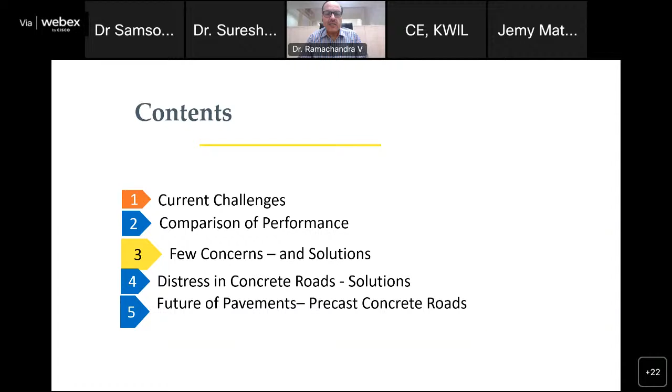So these are the contents: the current challenges we have, comparison of performance, and concerns and distress in concrete roads and solutions. These are the things that I want to deal with today.

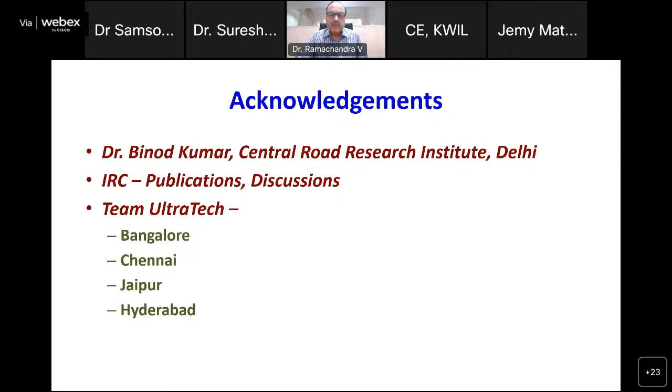Whenever I think of concrete roads, I always remember this great man, Dr. L.R. Kadiyali, who brought me into this concrete roads field. He pulled me into this, and I am forever indebted to him. He exposed me to the various aspects of construction of white topping as well as concrete roads. In my lecture today, I respectfully acknowledge contributions from Dr. Binod Kumar of CRRI and several IRC publications and discussions. As a committee member, I have gained a lot from them. My team in Bangalore, Chennai, Jaipur, Hyderabad, and Kharagpur have always worked with me implementing these things.

Coming to concrete pavements, India has a very small share of concrete pavements. Japan has about 6% of its roads as concrete roads, whereas in the US it is about 35%. Korea has the most, with 63% of Korean roads being concrete roads, compared to less than 5% concrete roads in India.

In these days, the number of concrete roads coming up is quite huge. It is not that concrete roads are new. Long back, considering the world affair, 1909 was when the first concrete road was made in Detroit, USA. On the right-hand side is a very interesting thing: a pavement with interlocking concrete paver blocks in USA, done in 1906, more than 110 years back. This photo is not from 106 years back though, it was taken hardly about 20 years back, which means even after 90 years of construction, this road is giving fairly excellent service.

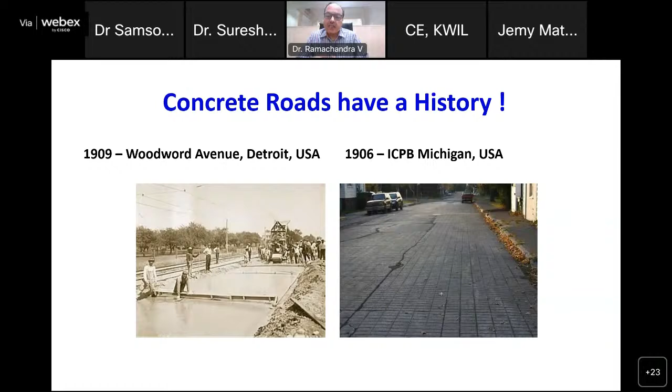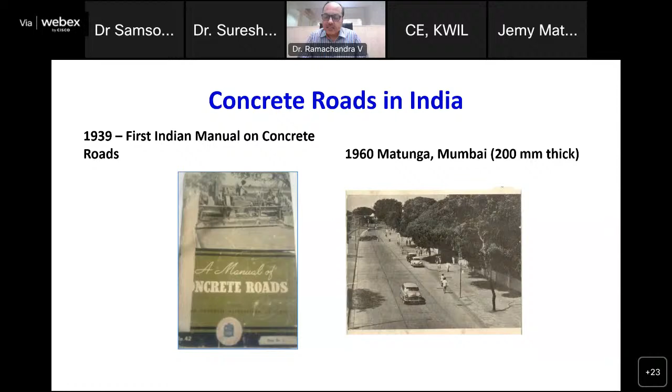As far as India is concerned, the first Indian manual on concrete roads was published in 1939. On the right-hand side is the concrete road built in Matunga in 1960, 200 mm thick, with no overlay even today. I repeat, even after 62 years there is no overlay, and this is giving excellent service even after 60 years. That is the life of concrete roads that you have.

But currently we have a lot of challenges as far as our roads are concerned. This is a very common scene, whichever city you are in. Don't look at the color of the bus and say that only Mumbai is bad and other cities are better. Wherever bituminous pavements are there, this is a problem that we are seeing. As per 2017 statistics, pothole-related deaths, people who died due to potholes, were more than 3,500 in India.

Peter. Sanjay? Sir, I think there are some issues with Ramachandra sir's net connection. Okay, probably you can contact him and he can mute his video if it's okay.

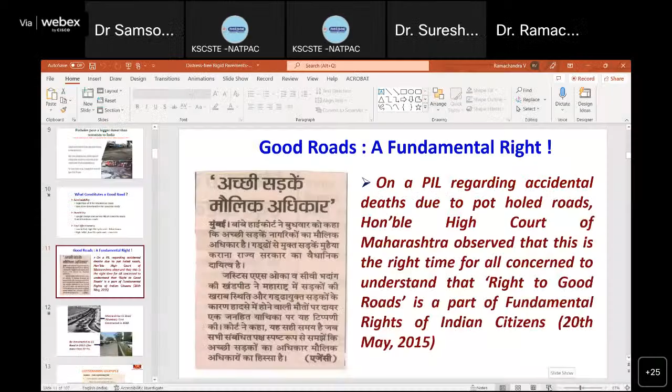Yeah, I think I have joined now. Okay, sir. My slide is visible now. Sir, slide number 9, I hope my slide is visible now. Yes sir, you are talking about slide 9. Now I'm talking of good roads as a fundamental right. Right sir, yes, no problem. Other things I have already explained, therefore there is no issue. In fact, the Bombay High Court, in the year 2015, has said that right to good roads is a part of fundamental rights of Indian citizens.

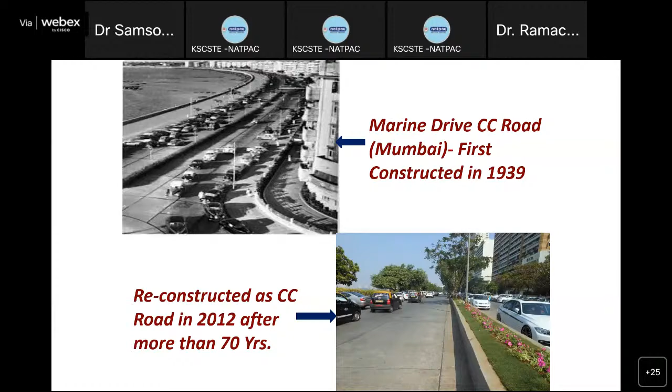So it is also important that because this is recognized as a right to have a good road, it is imperative that we construct good roads. Now, this is the Marine Drive Road, constructed in the year 1939... it lived for more than 70 years, and in the year 2012 an overlay was put after 73 years of its service. There are several such examples.

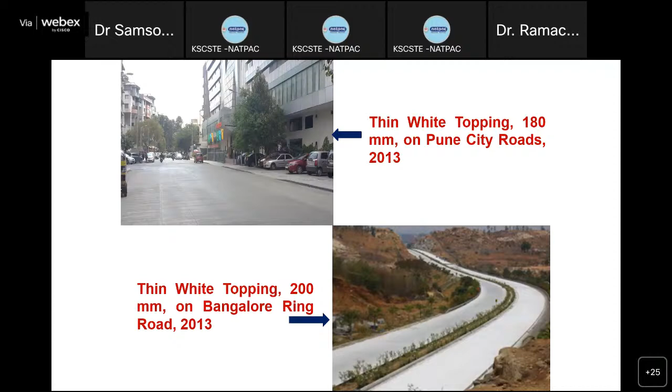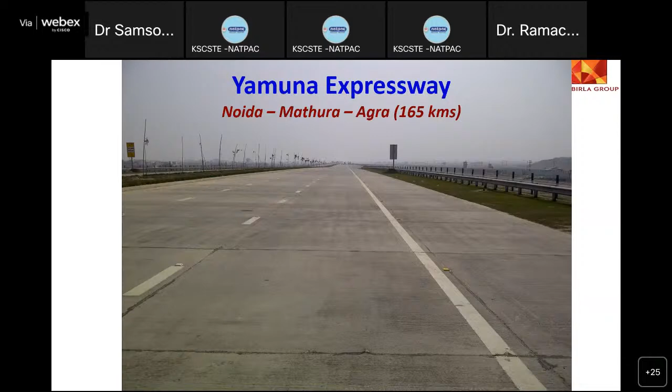The Mumbai Expressway was constructed, and in white topping, Pune has constructed a lot of roads. Even Bangalore and Chennai have quite a few roads made out of white topping. Now as far as highways are concerned, the Yamuna Expressway, 165 kilometers between Noida and Agra, is constructed with blended Portland Pozzolana Cement, PPC cement. This is constructed with M45 grade of concrete, an 8-lane road, and you can see this road is not inferior to any roads you see in any advanced countries.

Now when we think of the comparison between a bitumen road and a concrete road, the difference is that because concrete is a rigid material, the loads get distributed over a larger area, and therefore pressure on the layer below is always less. In case of bitumen pavements, the loads get distributed to the layers below also, and therefore the pressure is normally higher. So one question that comes, which I have just put for comparison, is: who damages the roads most?

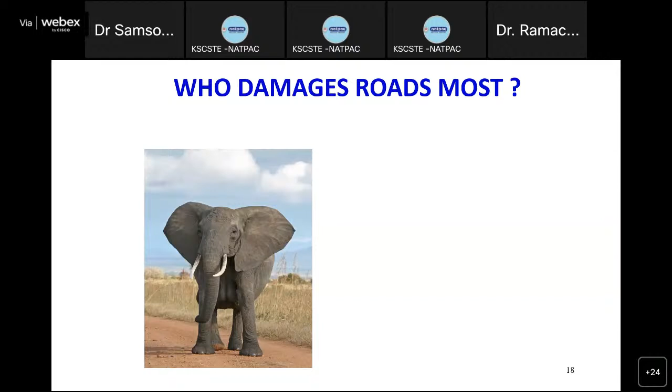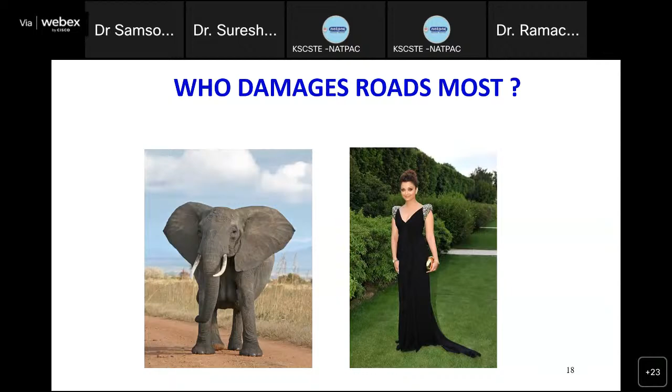We are talking about the damages. Who damages the roads most? An elephant walking on the road, will it damage the road most? Or a beautiful lady like Aishwarya Rai walking on the roads, will she damage the roads worse than the elephant? This is a simple question, and the answer is quite obvious.

Let's assume Aishwarya Rai weighs 60 kgs and she stands on shoes with pointed heels. So, 60 kg divided by 2 shoes, 2 points, 5 square centimeters per point, the pressure comes to 3 kg per square centimeter.

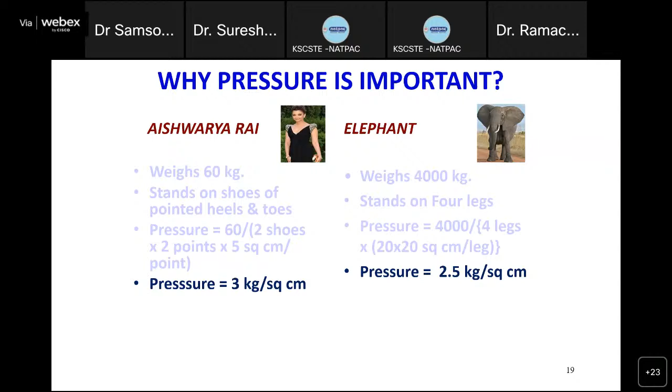Whereas in case of an elephant, it weighs 4,000 kg and stands on 4 legs, with an average area of 20 by 20 centimeters per leg. The pressure is 2.5 kg per square centimeter. Therefore, it is not the load that is important, but the pressure distributed over an area that causes damage to the roads.

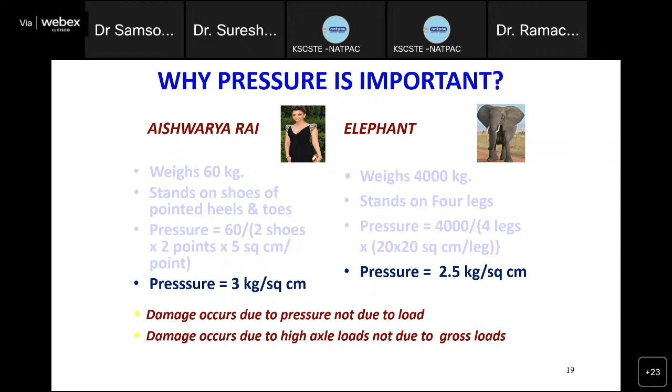There are a few issues I want to mention before we go to the stress analysis. Concrete roads are very good from several points of view: from the cost comparison, it is better, from sustainability it is better, life is better, maintenance is nil, and light reflection is better, and so on.

So many good things are there, but there are a few issues. Number one, when concrete roads are constructed, we cannot allow digging of concrete roads. Normally, whenever a road is constructed, after some time some agency, whether water, power, or sanitary services, needs to access their service lines, so they dig and cut open the roads. This is one thing we should avoid.

Second, generally when you drive on a concrete road, the noise will be slightly higher compared to bitumen roads. This noise can be reduced by going for longitudinal texturing rather than transverse texturing, which is not a normal practice in India, but it reduces noise.

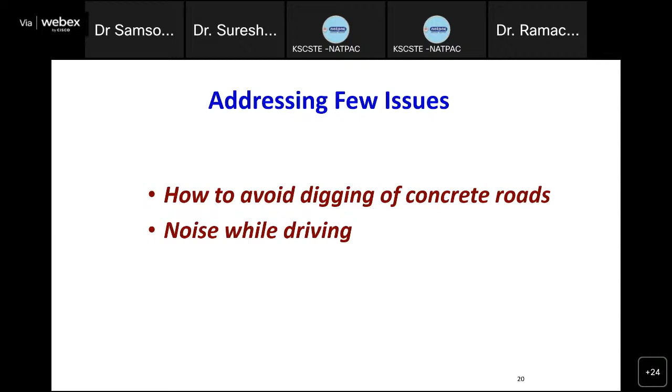These cross ducts are placed at, let's say, 50 or 75 meter intervals, depending on the population of that area. You can always access service lines through these cross ducts instead of digging the road. Even on small roads, this can be done, with cross ducts present at regular intervals so that you can access whatever service lines are present on that road.

Maintaining quality in concrete road construction is always most important so that we avoid problems. If there are problems, there are always solutions, but it is better to avoid problems by going for better quality in road construction.

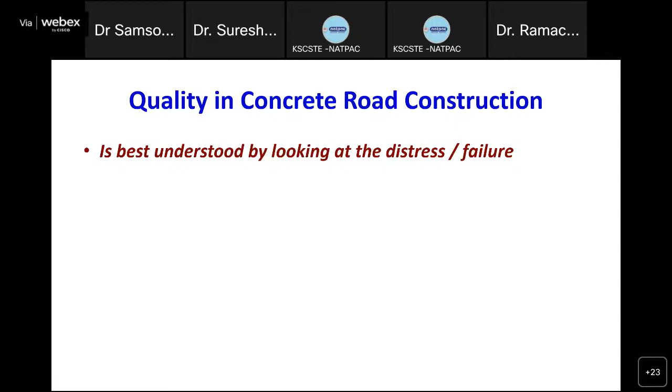This is always best understood by looking at the distress pattern or failure pattern. The reasons could be deficiency in design, material, mix design, or construction, which starts showing up in the form of cracks, structural failures, etc. But if the distress is noticed, correction techniques are always available.

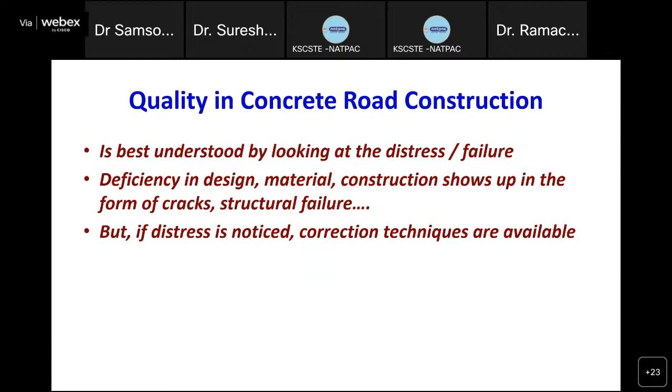There are a lot of IRC codes available for the design, construction, and maintenance of concrete roads. In fact, IRC has been revising these codes quite regularly. One of the latest is IRC SP 83, 2008, it was revised again in 2018, guidelines for maintenance and rehabilitation of cement concrete pavements.

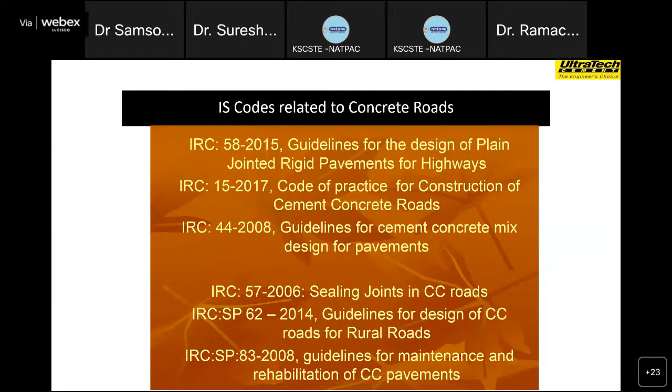These are all the IRC guidelines for construction of roads that need to be followed. For design guidelines, IRC 58 is always applicable for roads having commercial traffic over 450 CVPD. For low volume traffic, you have IRC SP 62, which needs to be followed. Now, one or two basic things as far as PQC, pavement quality concrete, is concerned: normally concrete roads are designed for flexural strength.

It should be about 40 to 45 kg per centimeter squared, or 4 to 4.5 MPa flexural strength. If you use M35 or M40 concrete, you will be able to achieve this.

Suppose we go in for manual concreting, which we used to do in the earlier days, the slump can be 40 to 45 mm. Whereas if we use fixed form paving, concrete comes in transit mixers as ready mix concrete, and it is poured and pumped. For pumping, you require a minimum of 75 to 80 mm slump, or even 100 mm slump. If it is less than that, it becomes difficult to pump concrete.

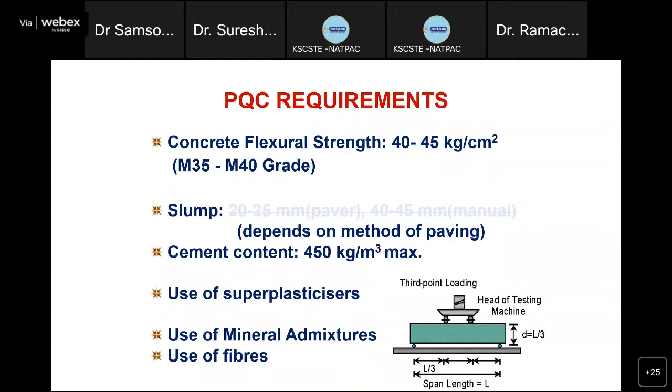The last one is about the use of fibers. Use of fibers will help us in reducing cracks; crack control will be much better if we make use of fibers. It is not necessary that we use steel fibers; even polypropylene fibers or polyester fibers are good enough to achieve crack resistance.

Now let us directly come to the distress part on the concrete road. What are the types of distress that we see? These distresses can be classified as structural distress and functional distress. If concrete has a structural problem, it is definitely a very serious issue. If it has only a functional problem, corrections are definitely possible. We need to look at the failures and determine whether it is a structural or a functional failure.

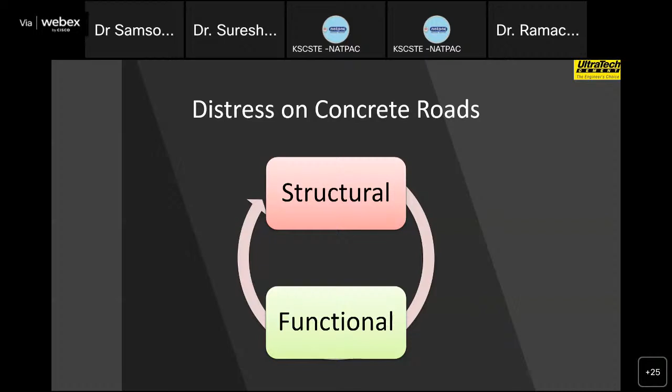Now let us go through the different types of distress and their causes. First, let us look at cracks. We can have transverse cracking, longitudinal cracking, corner cracks, durability or D-cracking. There can be certain joint defects, joint seal damage or spalling of concrete. There can be some minor surface defects, map cracking or shrinkage cracking, scaling, polished aggregates, and pop-outs.

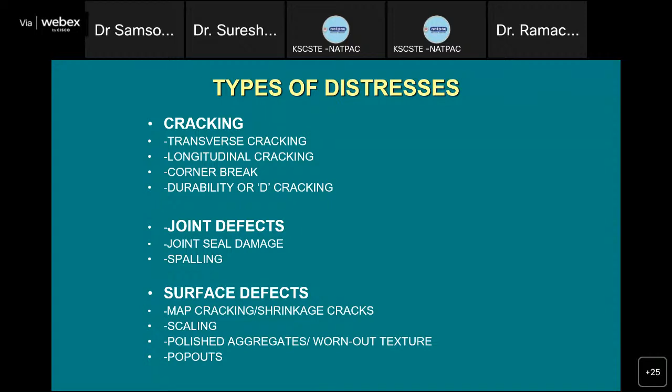Let us try to understand what these types of distress are. Longitudinal cracking, in recent times, is being seen on a lot of our highways. Indore bypass is one example. In fact, when we were doing our white topping work in Kharagpur, we noticed this on national highway NH60, longitudinal cracks very close to the shoulders. This was observed, and the length of this crack goes into 1.5 kilometers. Longitudinal cracks continue to be there.

When a core was taken at the grooves, you can see below the grooves there is no crack, which means concrete is cracking somewhere else, not where we want it to, that is below the grooves. Reasons for this could be many. One reason is that because of the widened shoulders, the slab action will not be in the longitudinal direction but in the transverse direction, making the length across longer. Second, the shoulders do not have as much support as the main line. Below the shoulders are the subgrade and subbase, which are not as strong as the main road's subbase or subgrade. Therefore there is a differential effect, which also contributes to the longitudinal cracking.

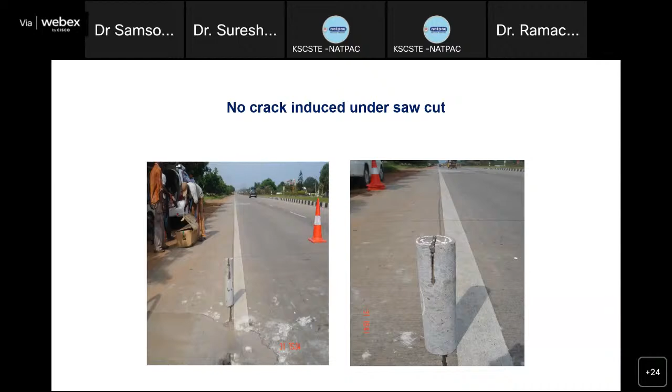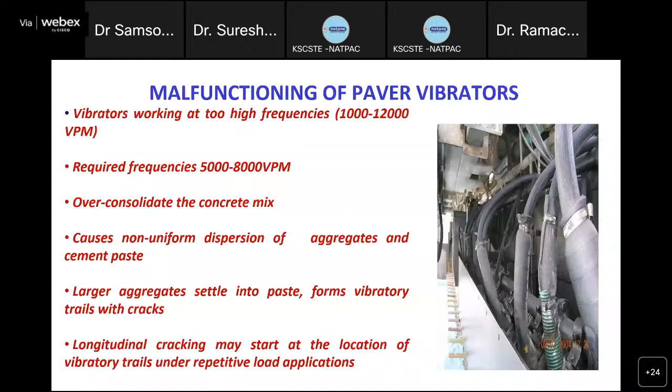Normally, the frequency of the vibrator should be around 5,000 to 8,000 vibrations per minute. If the vibrations are too high, of the order of 10,000 to 12,000 vibrations per minute, it will result in this kind of cracks. It causes non-uniform dispersion of aggregates—there's too much vibration, and the aggregates and cement paste get segregated, leading to these vibratory cracks. Therefore we must take precaution during concreting and ensure the vibrator frequency stays within the specified range of 5,000 to 8,000 vibrations per minute.

Now let us consider the other types of distresses, one after the other.

Now, how do we avoid this? The best way to avoid plastic shrinkage is to do night concreting rather than day concreting. During the night, if concreting is done, it will always be better since the temperature will be quite cool. But since we cannot always do it at night and have to do concreting during the day...

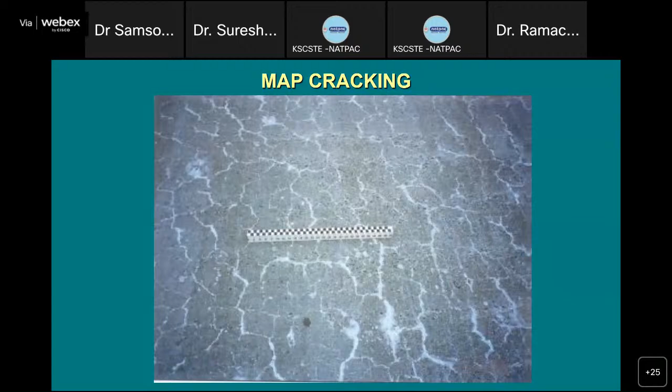Sometimes what may also happen is scaling. Scaling means removal of the finer surface material from the top surface—the cement paste gets eroded and aggregates get exposed. This is called scaling. If there is too much fines in concrete, meaning the cementitious material content is very high, combined with non-uniform vibration, that leads to scaling. How to correct it, we will come to that later.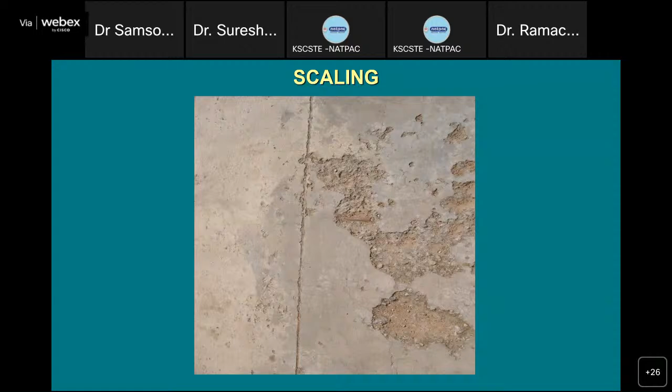Sometimes if the finer materials on the top surface are all removed, it exposes the coarse aggregates. As vehicles move on these coarse aggregates, they get polished, and therefore you see what is called a polished surface on concrete roads. This is also one type of defect observed on concrete roads.

Now you can see here, in one part of the photograph there is no polished aggregate, but on the other part you are finding polished aggregates. This happens because of ineffective curing before ponding or a high water cement ratio. One lot of concrete got a good mix, while the next lot was not good in terms of water cement ratio, and curing was also not efficient. Therefore you are seeing two different types of behavior on the same road.

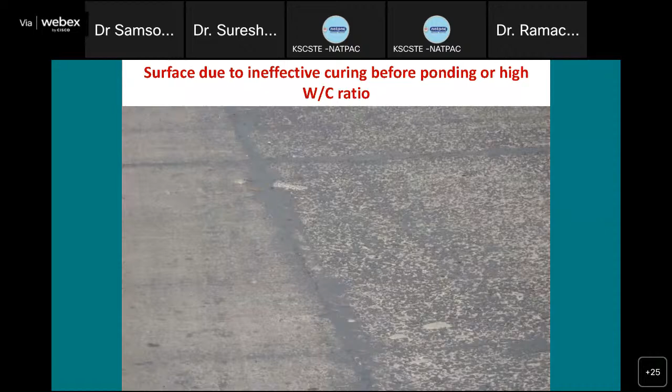Now, pop-outs like this happen if there is no proper quality control, or in other words, there is some organic matter on the surface when you are concreting. Once concrete hardens and this organic matter goes off, it leaves a pop out like this.

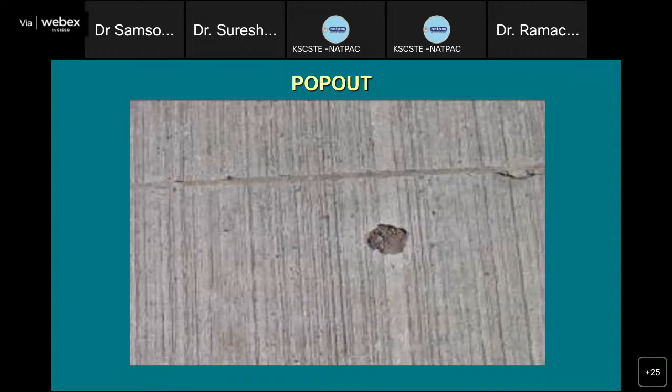These kind of pop-outs happen because when concrete is still fresh and not set, if either dogs walk on this or human beings walk on the road, it will leave footprints. This is something very unfortunate. You can understand if dogs cross the road, you cannot control all the dogs, that is all right. But if we cannot control human beings crossing the road when concrete is soft, that is a very unfortunate thing. It requires a lot of time, effort and money to correct these things. This is a typical pop-out.

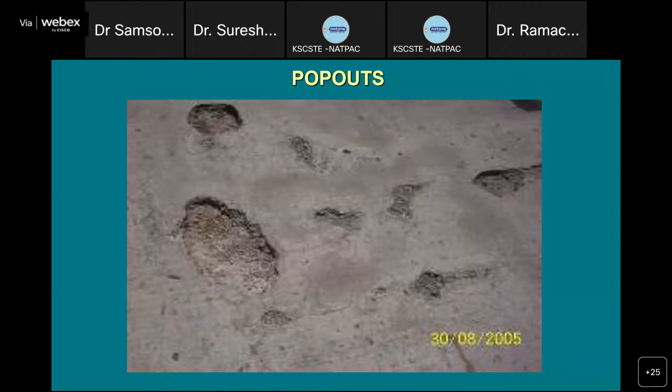Now let us come to how to prevent this, and what is the treatment in case cracks are there. Cracks in concrete can be classified under three heads.

One is concrete in the fresh state, meaning concrete is still fresh, green and soft. The second case is the plastic state, meaning concrete has set but has not hardened. That means within about the first 24 hours, concrete has set but not hardened, and it has started picking up its strength. The third are the cracks that happen in the hardened stage of concrete, after 1 week, weeks, or after 1 or 2 months.

Now, if you look at the fresh state, as I have shown examples earlier, cracks may come because of operational reasons, because of vibrations of the paver machine. It can also be mix related, maybe not a proper uniform or cohesive mix. It will also happen because of loose edges.

Whereas in the case of plastic state cracks, mainly it is the thermal shrinkage or plastic shrinkage cracks that you observe. Whereas in the hard state, when concrete hardens and high strength concrete is used, it is slightly brittle, and therefore when it hardens it starts shrinking, and because of the internal stresses, some cracks would appear.

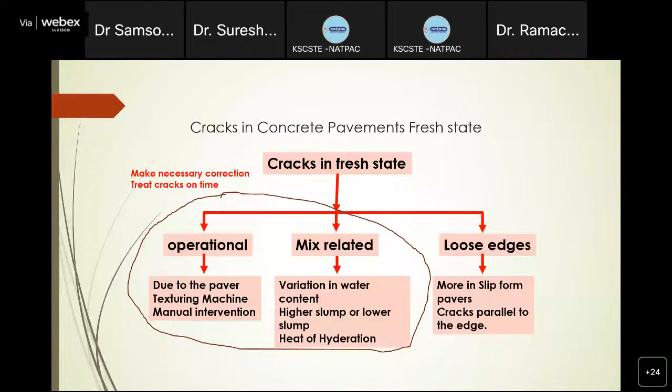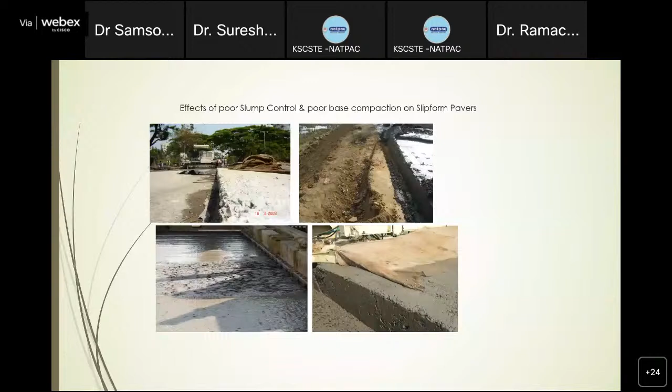Therefore, in all these cases, we must make the correction then and there itself, not delay that. Here you are seeing some photographs showing the effect of poor slump control and poor base compaction in slip form pavers. Now the edges, in some cases, you are seeing it is breaking. These are the cracks like this, which are happening when concrete is still in the fresh state.

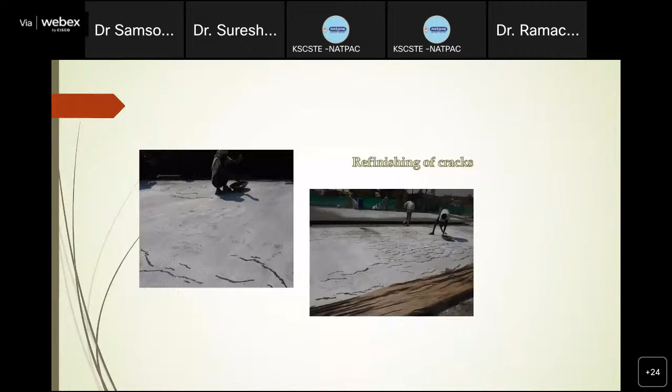We can always do refinishing, meaning with slight cement or cement mortar with water, you make that slurry, cement slurry or mortar slurry, and you refinish the entire surface with the trowel, correcting these cracks. These cracks would get corrected because concrete is still in the fresh stage. Now, for cracks in fresh concrete, the treatment is: number one, identify the reasons for the cracks to appear and take the preventive measures.

For cracks that appear while the concrete is still green, retrowel the concrete with a thick cement slurry or cream vibrated concrete, and do the texturing. These texturing machines should be ready and available, and transverse or longitudinal texturing should be done as early as possible. Curing compound should be applied immediately after texturing. That means laying the concrete, finishing it, texturing it, and immediately after, applying the curing compound. Automated engines will take care of this.

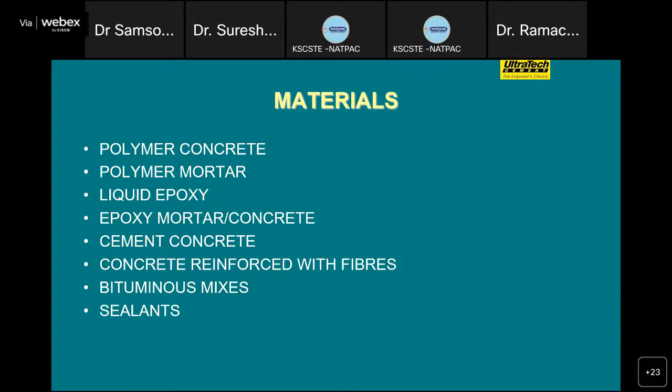Now, what are the repair techniques? In case cracks or pop-outs are there, what repair techniques do you have? There are many repair materials available today: polymer mortar, polymer concrete, liquid epoxies, epoxy mortars, normal cement concrete reinforced with fibers, fiber reinforced concrete, bituminous mixes, and sealants.

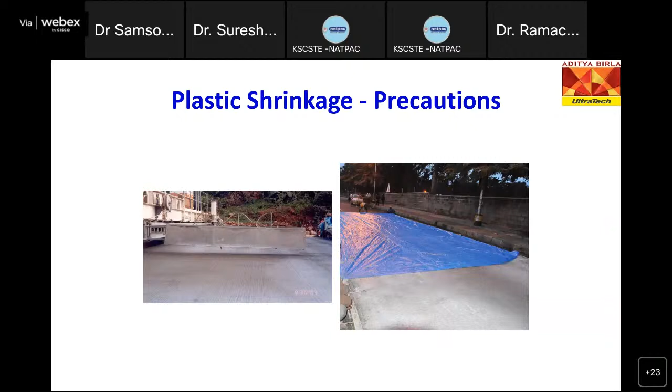This is what I was telling you about plastic shrinkage cracks. Covering it with a plastic sheet is the best precaution you can take. In the other photograph, you can see curing compounds being sprayed onto the road so that it forms a layer and prevents cracking.

Now, in case shrinkage cracks appear, the procedure is simple. Clean the cracks with a wire brush and pour low viscosity epoxy resins, which are available in the market, into the crack, and sprinkle fine sand over this sealed crack for skid resistance. That will take care of plastic shrinkage cracks.

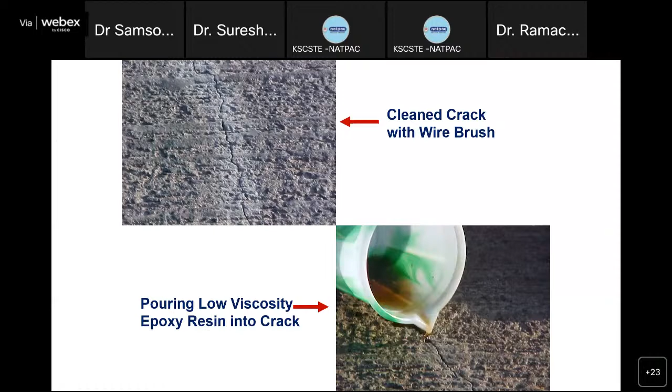You can see in the first photograph the cleaned cracks with the wire brush, and then the low viscosity epoxy resin poured into the crack, and sand sprinkled over the cracks for skid resistance, and the road is finished.

There was one hand raised. There was a question, I believe. Professor Kavita, if you have the question, you can ask right now, or we can take it later also. It is yours. I think we'll take it later, sir.

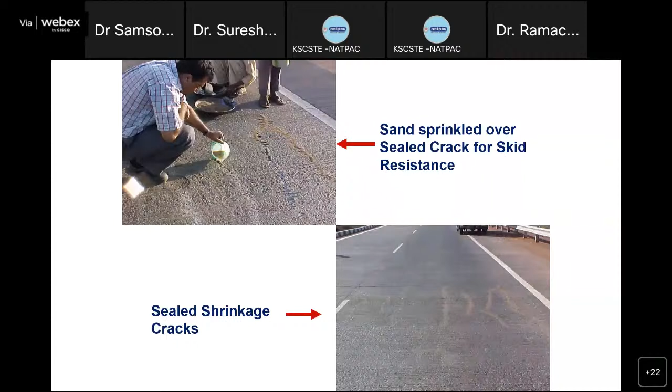Okay, now the road is finished and you're able to see the sealed cracks. Now, if the cracks are wider, let us say half an inch, then we manually widen them to about 3/4 or 1 inch so that the repair epoxies can be poured into it. You can see it is being finished.

You have these grouts that are available very widely. They are applied and the cracks are all finished. The only thing is, once finished, you may be seeing these finished patches. They may be visible, but functionally that will not cause any problem.

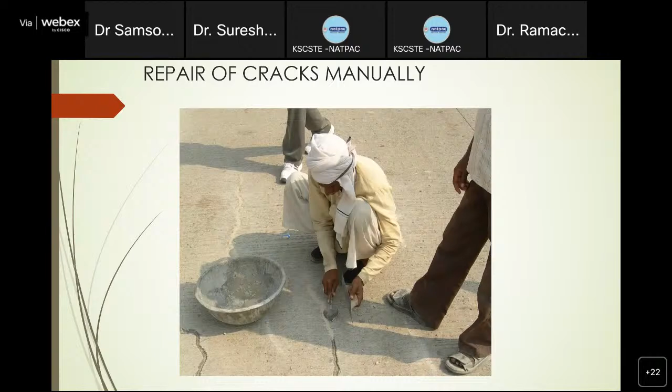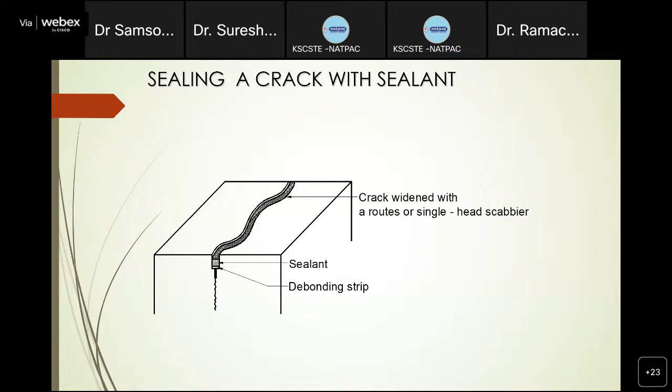Sealing a crack with the sealant: the crack, if less than half an inch wide, is actually widened up to about 1 inch, and then sealants are applied, and the debonding strip is also placed.

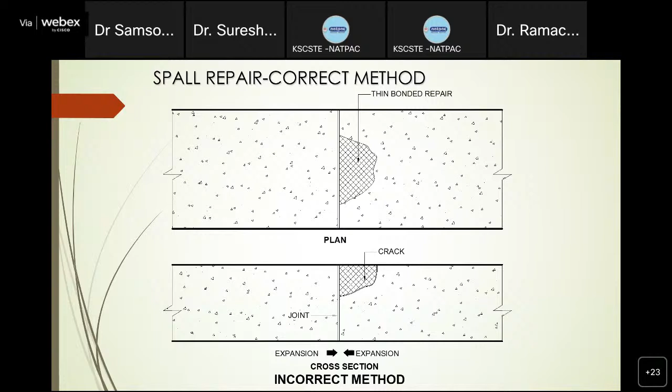Now, if there is spalling of concrete, as in the case of a pop-out, you can see that in the plan and elevation. You must make sure it is a rectangular surface in plan as well as in elevation, otherwise whatever grouts you apply will not stick to the road. Therefore, make it rectangular in both plan and elevation, and the depth should be at least equal to 1 inch or 25 mm.

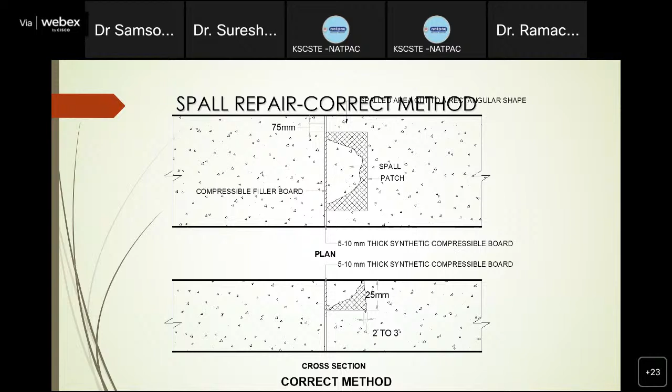And finish it with epoxy, which can get a strength of about 40 to 45 MPa within 24 hours, not 28 days. They can get a strength of 45 MPa within 20 to 24 hours. So we can use that so that the road can be opened to traffic very fast.

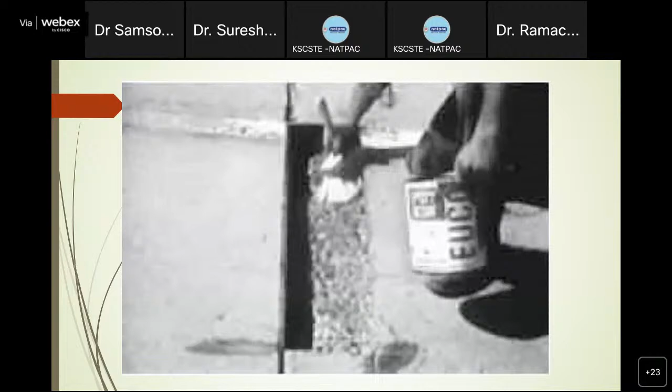Now this is one case where the deteriorated portion is being removed, and it is made rectangular in plan as well as in elevation, and finished with cement grout or concrete grout, so that the road is restored to its original condition. This is what is called a thin bonded repair.

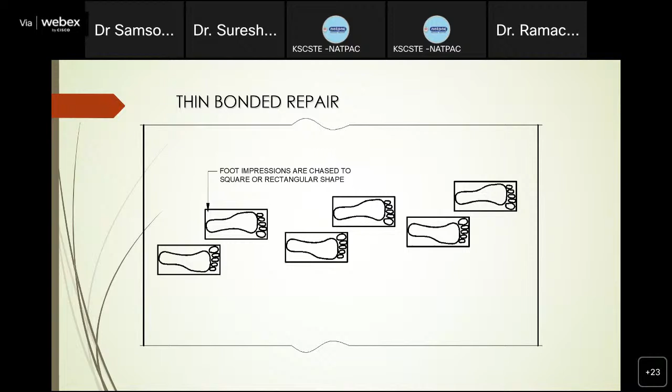If there are pop-outs like this, make it into rectangular parts and then finish it with that. This is another one, repairing of a pop-out.

There are a lot of materials available. One of them is the Ultratex Power Grout, which gets a strength of about 40 MPa in 24 hours. There are several such grouts available in the market, and this has been quite popular in Mumbai for several roads, used as a solution. The advantage with this grout is that it is an excellent material for repairing roads, airstrips, floors, and for crack filling, repairs to bridges and bridge decks also. It can be opened to traffic very fast.

Another method of treatment whenever there are cracks is what is called stitching. If it is a full depth crack like this, at an angle of 25 to 30 degrees, we make a drill hole across the crack, and within the drill hole you put a steel rod, maybe about 20mm diameter, and then grout the joints. That will ensure there are no cracks and no problem to this.

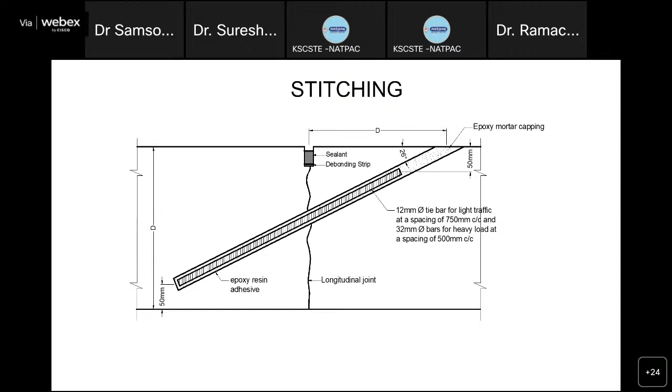At regular intervals, if the cracks are small, even 12mm rods are good enough, which are used for tie bars. The same tie bar rods, 1 foot in length, can be used at 750 millimeter center to center. If it is very wide cracks or a heavy road, you can go for 32mm rods. So across the longitudinal joints, these bars are placed, and this is called stitching.

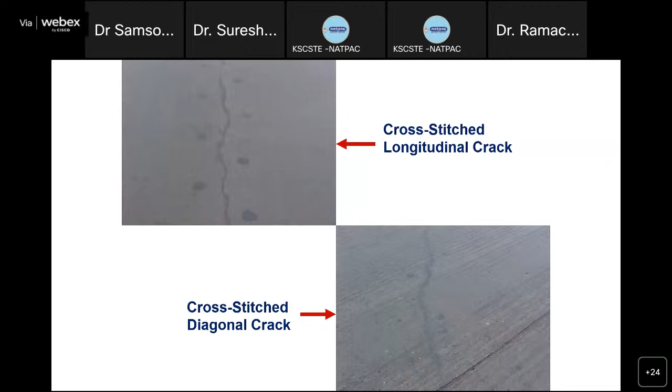Now after stitching is done, this is how it looks. Maybe it doesn't look so good. You can see the stitch marks there, but that is all right, though it may not give a very aesthetic look. The purpose is served: the concrete road is restored back to its original shape and strength. Now this is how the stitched slab looks like.

Another technique, wherever there are cracks, is called stapling. Staplers, you know how we do staplers on papers when joining papers, a very similar thing. In this case, steel pins are used, 16mm rods bent at both sides. They are filled into the groove, and epoxies are filled after this, and this groove is sealed after that.

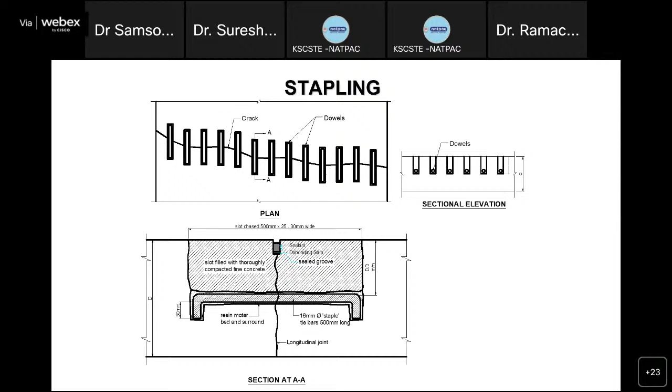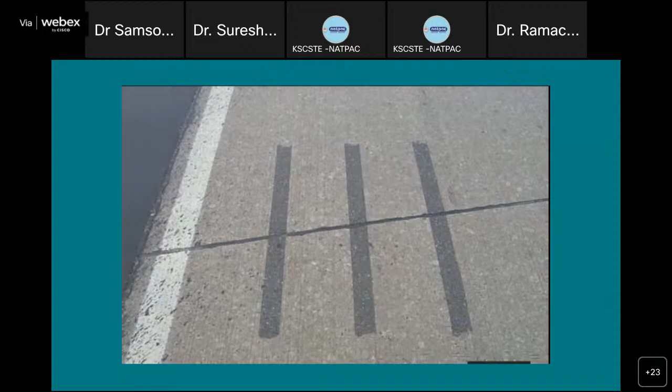This is called stapling. At a regular 500mm interval, these staplers are placed below, and at the top you finish it with the epoxy grout. So this is how it looks once it is finished, and there will be no further cracking of concrete once you do this.

All of us know about the dowel bars which are placed on concrete roads. As per IRC, dowel bars are required to be placed if the thickness of concrete road is more than 200mm. Now the question is whether dowel bars are required or not. Anyway, let us not debate that, because IRC has said beyond 200mm you have to use dowel bars.

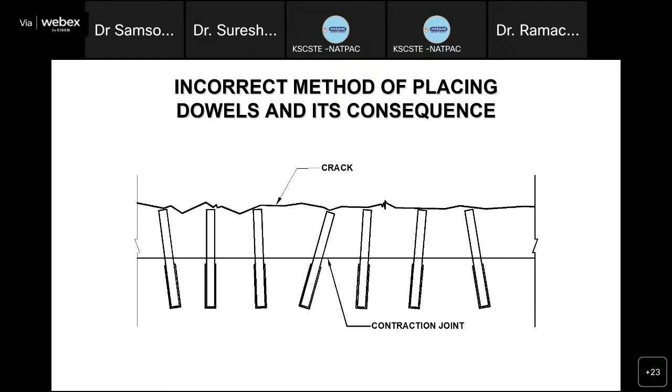Now, if the concrete surface has fully deteriorated, we can go in for full depth repair.

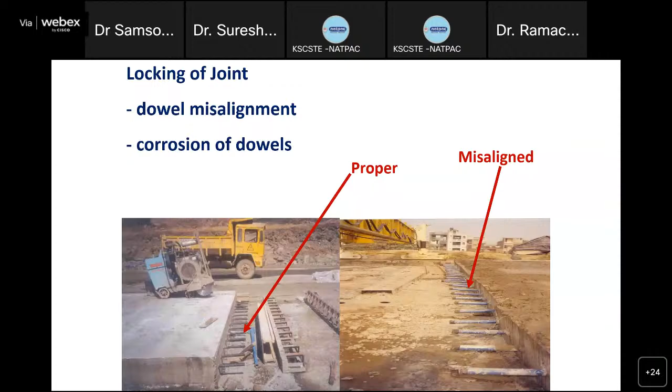Cut out the concrete from the surface and make it a rectangular opening. On both sides of this, provide dowel bars as per design, and provide proper chairs for putting concrete. You can see here, full depth cutting and removal of concrete is being done.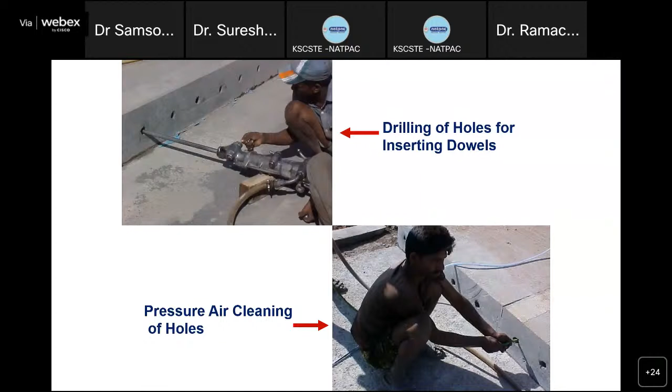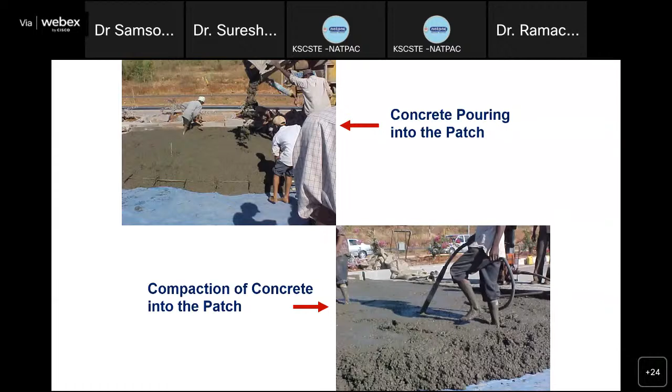After drilling holes for inserting the dowels, pressure clean these holes using pressured air, then insert dowel bars and seal them, and pour concrete. Now dowel bars are being inserted and sheathing is provided, and concrete is poured and compacted so that the entire patch is finished.

This is how the whole thing is finished: creating texturing, curing compound spraying, and the whole panel is complete. If you want to remove and redo the whole panel, this is the best way to do it. Whatever be the type of distress in concrete, remedial measures are always available, depending on whether the distress is in the fresh state or the hardened state of concrete.

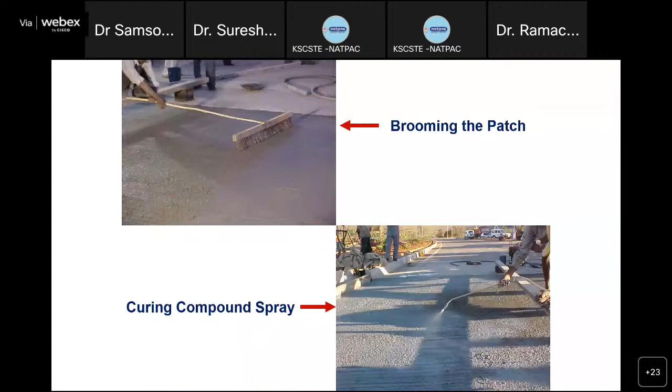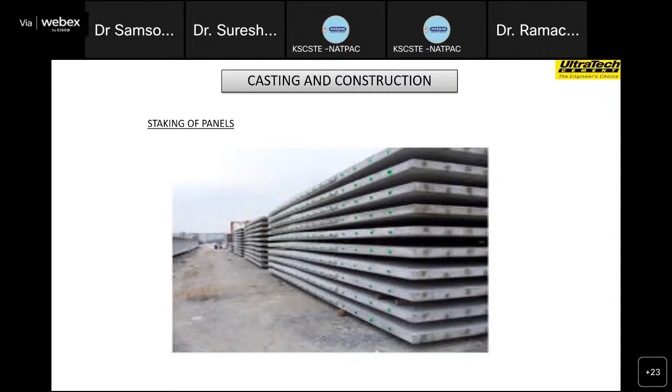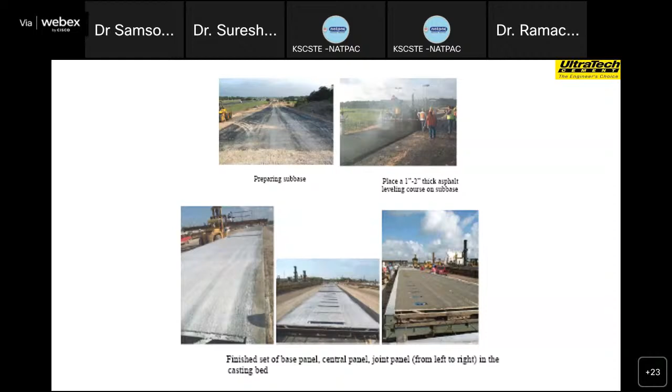You don't have to spend a lot of time making this concrete road, and the quality of concrete will be good. Cracks or pop-outs will not come; it will be an excellent road. This road, for the first time in the US, was done in 24 hours using precast concrete panels. Different countries are doing this; Singapore's experience is slightly different.

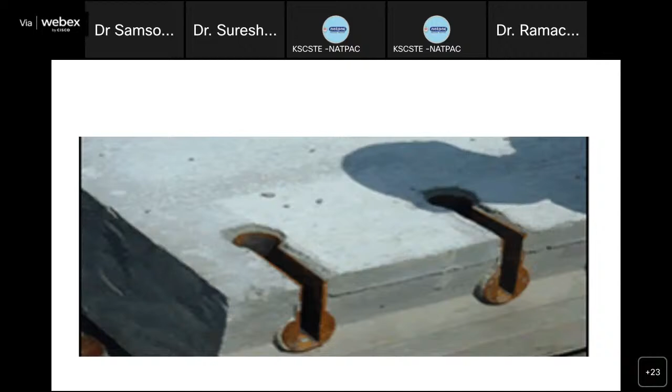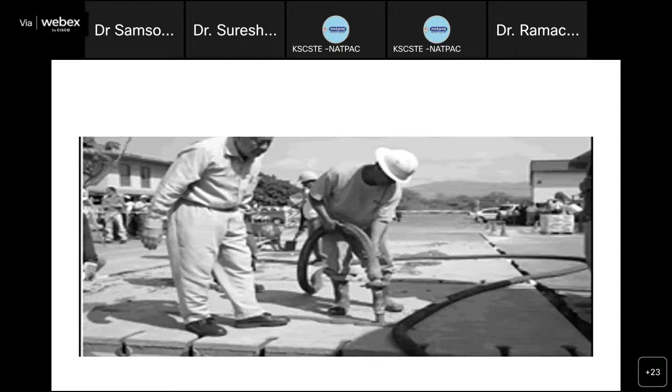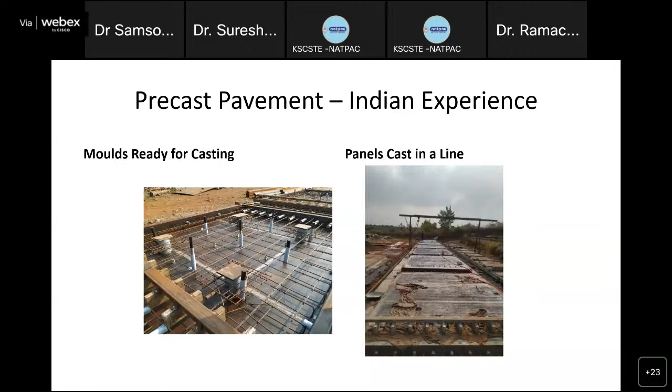That was 10 years back. We did not do it at that time, but now we have done it in Nagpur. The first precast concrete road in the entire country is built in Nagpur, about 400 meters, of excellent quality. These panels were cast in the factory, brought to the site, aligned, the joints were grouted, and the entire thing was completed in a few days time.

This was a very congested junction, and you're able to make this using the precasting unit. This is the best example, Professor Mathew, of industry-institution interaction. The design was done by VNIT Nagpur, it was executed by a precast contractor, and the concrete was made by UltraTech. This was an excellent achievement.

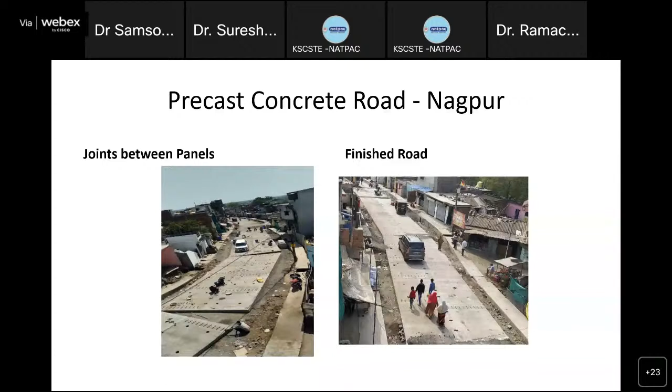This is a topic of research also, and now it is getting into the IRC code. The Indian Roads Congress has formed a code committee for this, and the code is coming, but this road is already done. The next road is coming up probably in Bangalore. The Bangalore Corporation has identified a road for making this precast road, and engineers and students in Kerala, Tamil Nadu, and Karnataka should make it an opportunity to visit this site during construction.

Sometimes people ask how a precast road compares. Definitely, it compares much better. As you can see, the rigid pavement thickness reduces from 300 mm to 200 mm because it is precast, cast in the factory, so you require lesser thickness. Therefore, comparison of cost also favors it. Steel diameter dowel bars, instead of 32 mm, you can use 25 mm.

Curing is not required at site. These are all certain advantages. Cost is also the same because the concrete thickness is less in case of precast. Therefore, whatever is the cost of a normal concrete road, the same cost precast road also can be done.

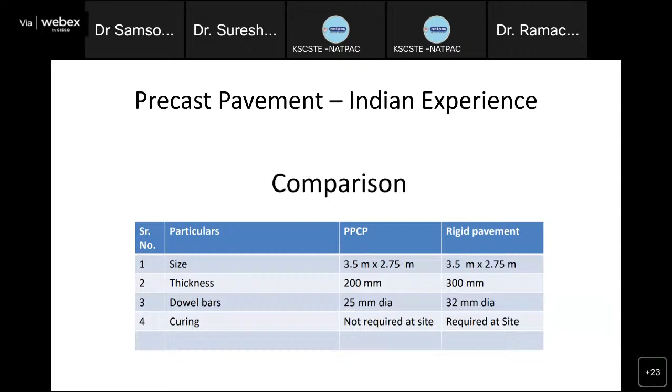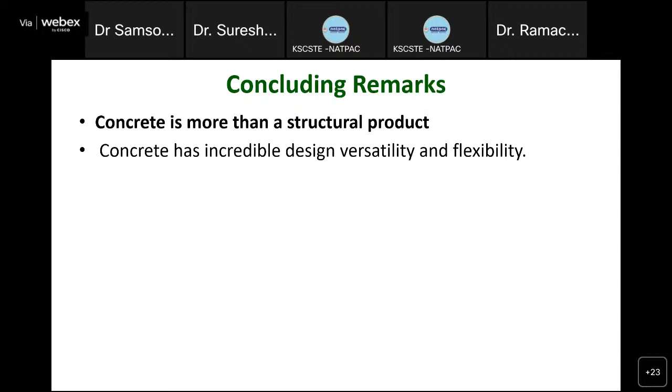The concluding remark is that concrete is more than a structural product. It is a very versatile product. It has incredible design versatility and flexibility, and it bestows environmental benefits, economic benefits, and social and quality of life benefits.

I'm fond of saying concrete is a democratic material because anyone and everyone can make concrete roads. It endures and it is tolerant, like democracy. Democracy endures, concrete also endures. Therefore, we can call concrete a democratic material.

But like democracy, which is most used in our country, sometimes it is misused, sometimes it is abused. Very similarly, concrete is also made very well in most cases, but sometimes we misuse it, sometimes we abuse it. Then we see all kinds of distress and collapse of the structure.

I would like to quote Dr. Kadiyali, who is my guru, who used to say that concrete is an unforgiving material. It shows up, it tells you what distress it has, and if you still don't attend to it, if there is fever, it shows up. You are supposed to give medicine. If you don't give medicine for the fever, then you will see a bigger disease.

Therefore, keeping that in mind, it is our responsibility to make concrete a distress-free construction. Whether it's a house or a road, distress-free construction is always the need of the hour.

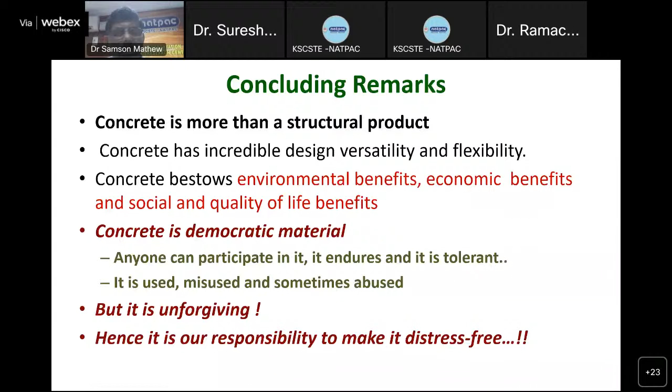Good. As I too have seen, the Nagpur panels when I visited, even that NH section, I've seen that. The precast one, it was there in the NIT campus also, I think. Correct, they started from NIT campus. Yes, myself and Veeravan sir, we together visited that during the IRC session at NIT Nagpur.

I think there is one hand raised. My other good friend, Lokesh, is there. Lokesh, good evening, welcome. Professor Mathew, I am very proud to say Lokesh was my student when I was teaching, but now he has grown into a great expert. Nice to have you, Lokesh. Sir, good evening, sir. Good evening, Professor.

Sir, can you just throw some light on grinding of concrete pavements? Grinding, that is retexturing? Yeah, exactly, retexturing. Because most of the time, what we are seeing is that over a period of time, due to the movement, the texturing as well as the skid resistance is reducing in concrete pavements. Can you please throw some light on that, sir?

Thank you. There are today these grinding machines that are available. Unlike the first time when you cut the grooves on fresh concrete, which is easier to cut, now after 4 or 5 years you are cutting hardened concrete, M40 or M45 concrete, so it is a bit difficult. Therefore, we need to use diamond groove cutting machines, which are available, including on hire. With these diamond groove cutting machines, grooves can be cut at predetermined distances or spans. This has been done on several highways where the concrete surface became quite smooth.